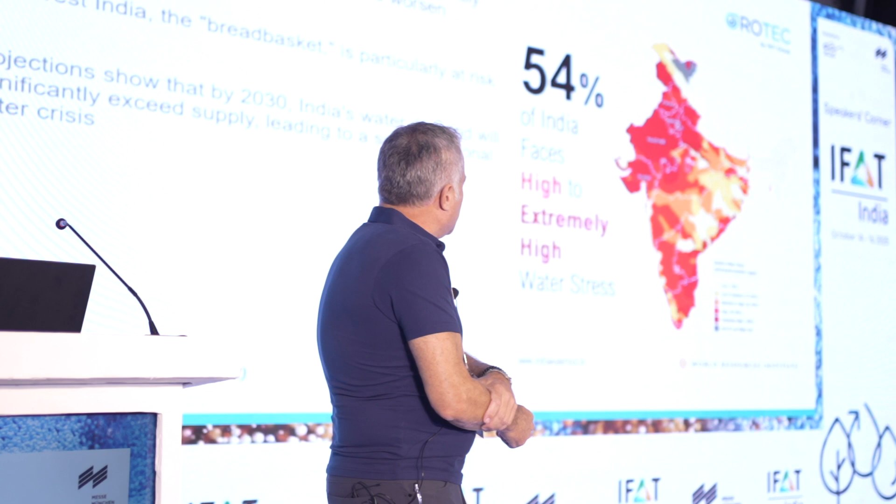Well, this is the fact of the matter. Coming to India, it's a continent. For those who don't know, this map shows the water risk areas or lack of water. And one of the things ROTEC brings to the table is a lot of water reuse projects. How to create from wastewater good water at affordable price, with reasonable technology installation. And I think this is where we are targeting.

But this is really an area where we didn't have installations yet. We have now 2 going. And I expect this to be, with our partners, a success story here, because the demand is exceeding everything we have seen. In the last, I think, 8 years, we've been talking about high recovery, let's recycle, it's too expensive, let's wait, let's think about it. What happened in the last 2 years is an explosion in our business, not only us, everybody you can see here around.

What we are trying to do, I will explain a little bit about the technology. We're looking to improve the reliability and the efficiency of the desalination process. Everybody is familiar with these problems. Membranes are fouling. It's like laundry. You take your shirt, you clean it too much, it loses its performance, appearance, permeability, membrane rejection. All these problems are around this phenomena.

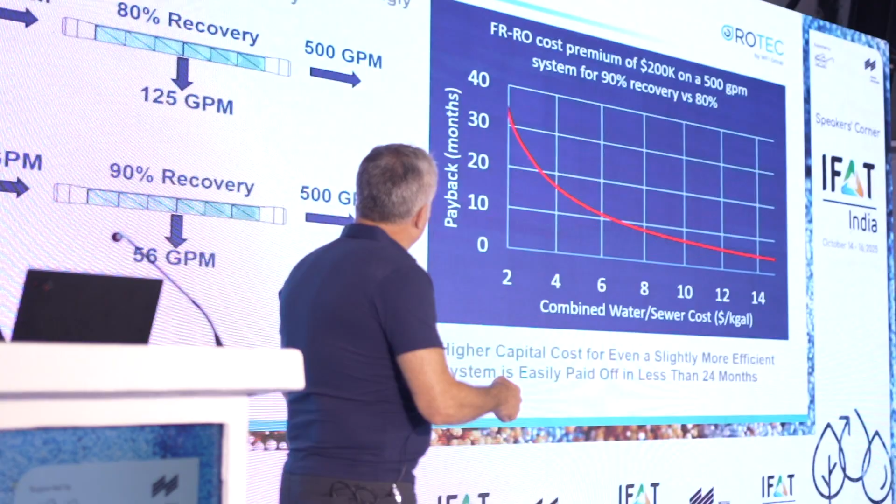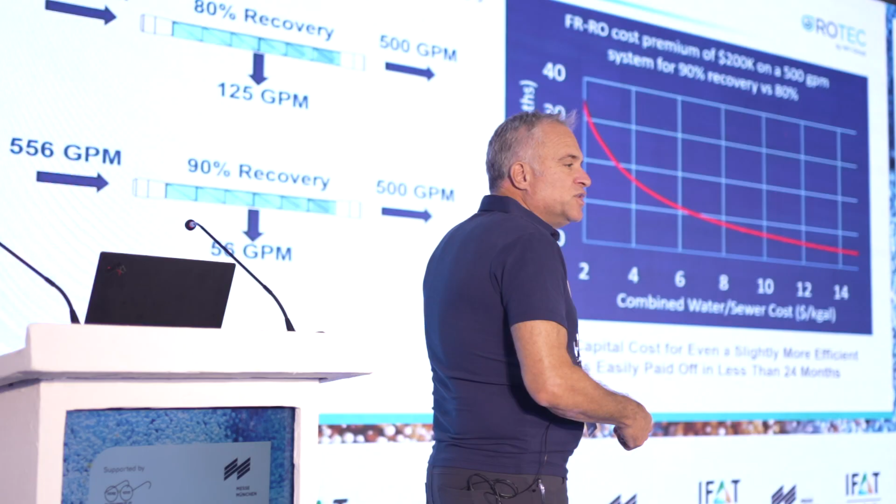And what we are trying to do is we are trying to take this into an area where we are reducing either the feed or improving with the same feed the high efficiency. So you can see what happens to our brine. It's cut by almost half when you are just adding 10% recovery.

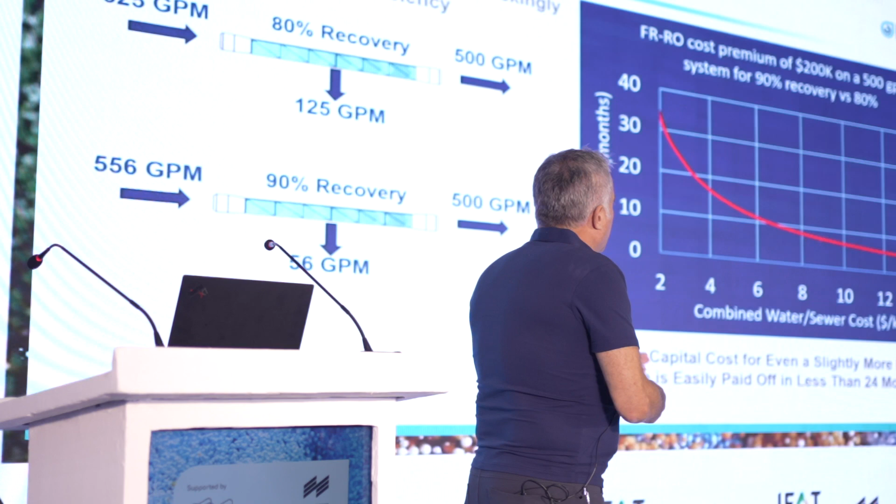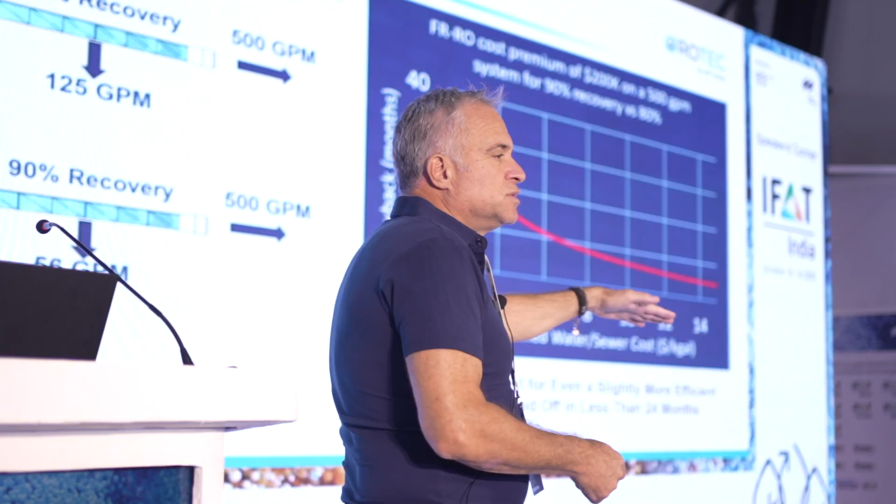Speaking about footprint, talking about our collaboration with the environment, this is a very strong example. And also the cost. What cost maybe a few years back to do 80% or 90% now is reducing. We are improving the efficiency of the costs related to high performance.

Like I said, retrofitting. What you see here is an example from Singapore, and I will show you, but we're able to take standard design, retrofit to ROTEC, and we can immediately have better performance. And these solutions are resisting scale and fouling, based on some performance.

What is flow reversal? Technically, you see a pressure vessel here. It works. We are charging the last membranes. It will start to foul. There will be precipitation on the membrane. So, when all this is done,

what you see is the membrane surface starts to precipitate. You start to see the fouling that is avoided by antiscalants, etc. But it's not completely eliminated. It's built up. Compared to other technologies, this is a standard or static design. All of these are more or less a static process. Nothing is moving. Everything sticks on the membrane.

So we developed a method to take this and get the scale washed away, changing the flow through the pressure vessel. So technically this would be our feed. When we are changing the direction, it will start to scale, then we are changing again. We are playing with the induction time. Now what you see on the software of antiscalants, they have their own formula doing it. When we added ROTEC into the equation, we were able to increase the recovery by avoiding these traps or recovery problems that we find in standard design.

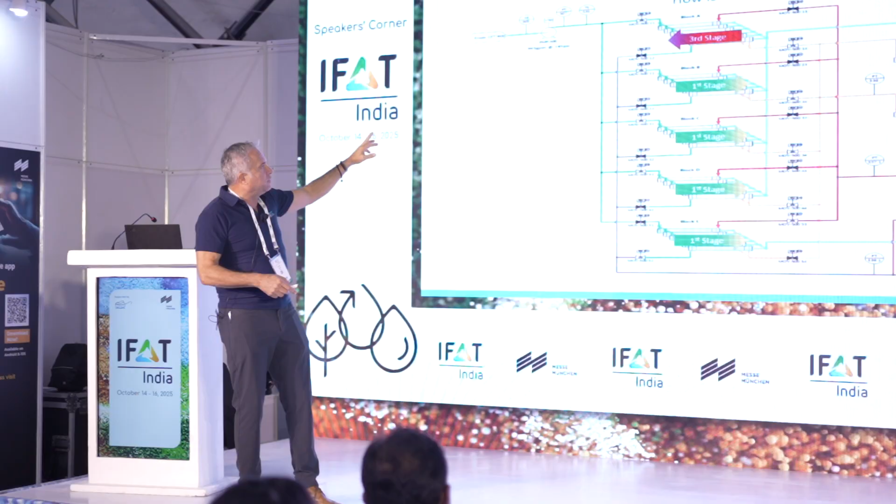This LSI factor that is very common in our industry is a good factor for us of how we can clean the membranes, and we are actually doing cleaning. We are charging the highly saturated water, and when we are changing the flow, we are undersaturated, so we are cleaning the membranes. So that's our technology.

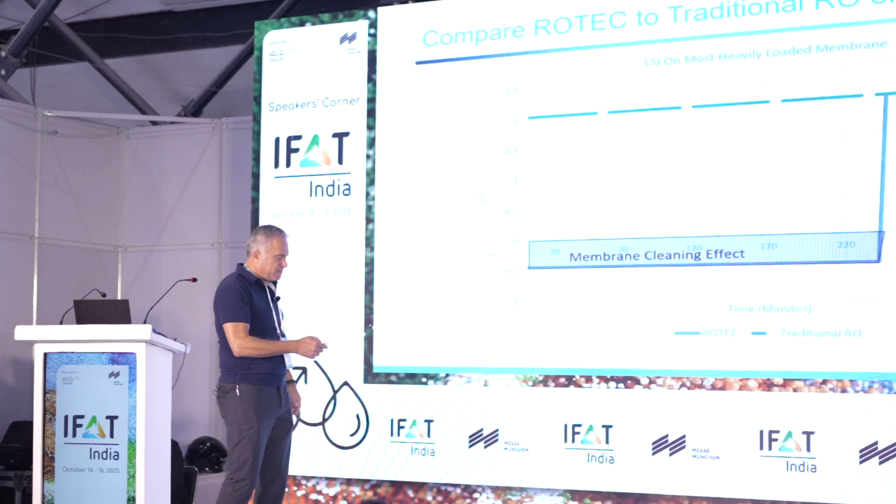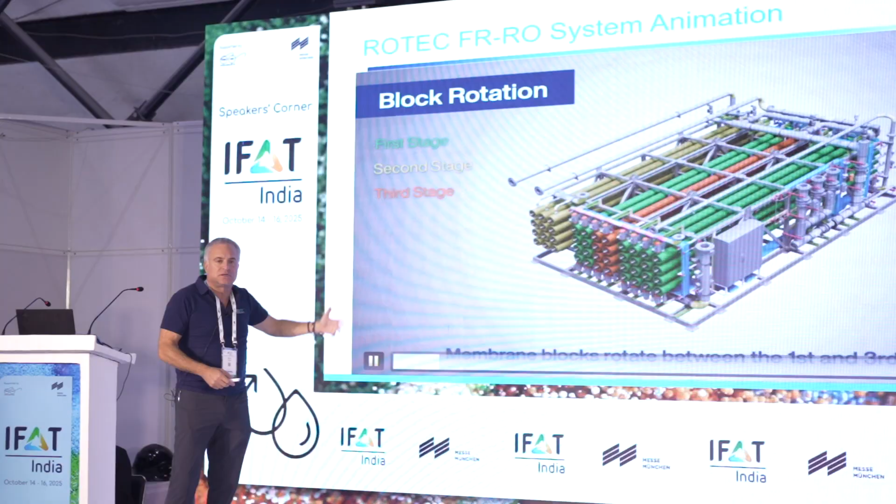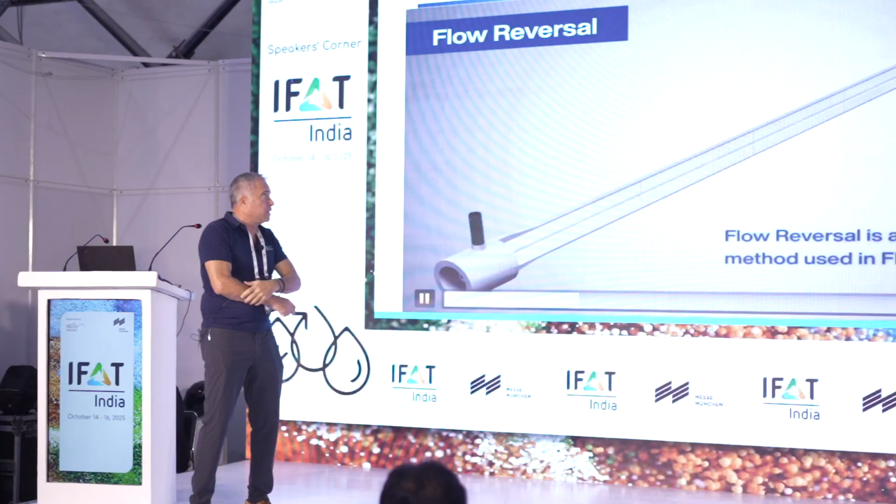I want to show you a short animation. So we have taken the patents and we put them into a real-life machine. This is a skid that our partners MWTS are building now for a semiconductor facility here. This machine will take individual pressure vessels and start to reverse the flow internally. And when we are doing this, we are able to avoid the standard clogging that you can see on a conventional machine.

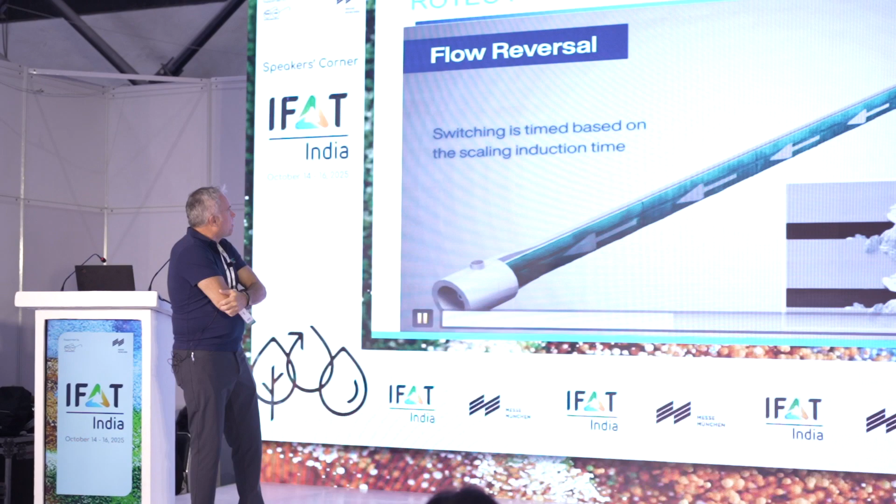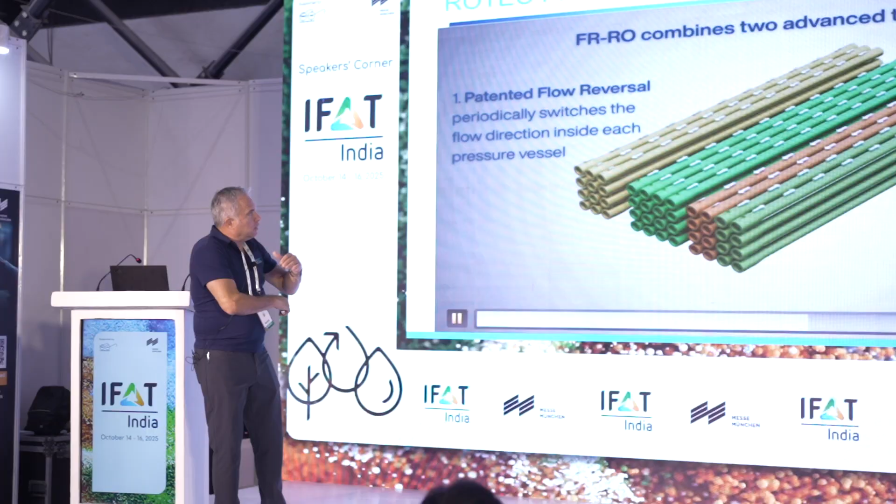So this scaling that starts to develop at the last end of the pressure vessels will accumulate, and then we are doing the reversal flow, switching based on time. Now we also have an AI tool that helps us to predict the optimization of this process. And now it goes back into the skid, and now we start to block rotate. In this way, we have an optimization of the rack.

We have an optimization of the hydraulics. Usually what happens when we are doing this design, we also reduce the specific energy. If you compare to conventional, this hydraulic arrangement and the LMH use less energy.

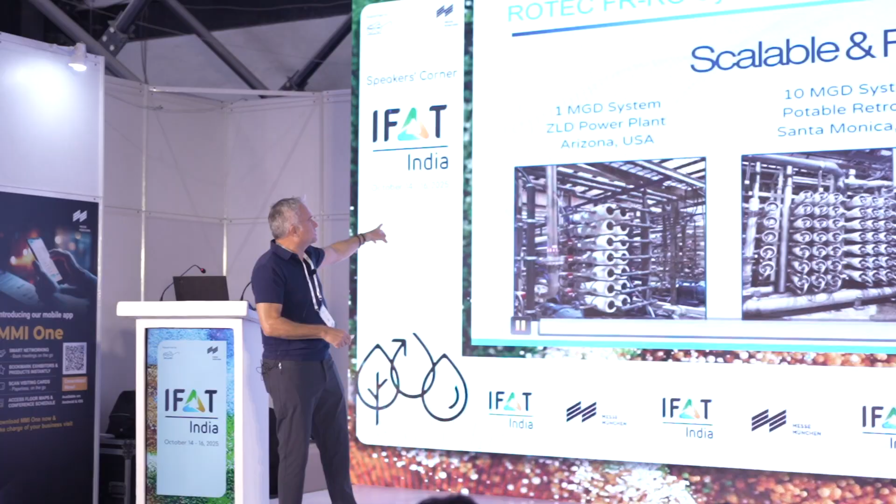Some of the examples here, from Singapore to Santa Monica or the US, it's been really in the business for these market segments, like industrial, mining, food and beverage. But municipal reuse looks like the largest growing section that we are dealing with.

We are doing industrial applications as well. That's close to ZLD. This is our very famous retrofit in Santa Monica, where we took an existing plant and just retrofitted it. So this short video shows a little bit about our technology when it's implemented in a real

company is offering, let's say, it's our toolbox, but we are offering a variety of services. Let's say the greenfield is obvious, everybody is interested to buy a new machine, but retrofitting, there are a lot of desalination plants in the world that are old and need to be retrofitted. We come with a nice solution that's also relevant for seawater double pass. It's also relevant for beverage, depending on the design. In some cases, we work with engineering packages when the project is either too big, complicated, or whatever. We are able to collaborate with a partner.